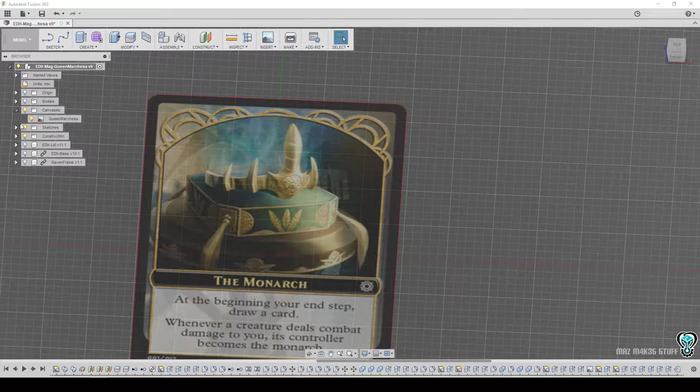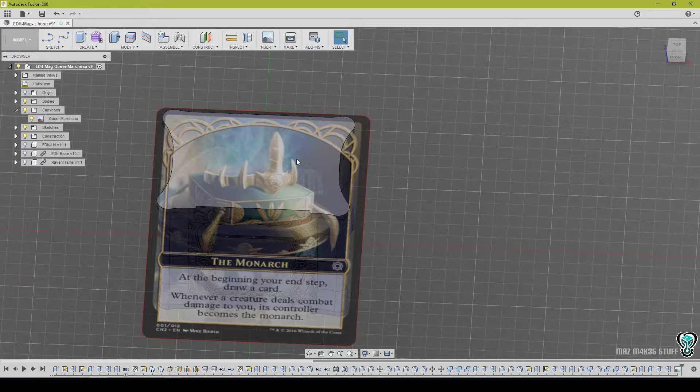So instead of starting a new file or anything, because I don't really need to, I'm just going to go back on my timeline down here to before I started creating stuff, delete that, and start back at the beginning. Now, since this image I have, the canvas, is basically just a reference, I don't really need it laying exactly over the top of my work - I can just move it over to the side to have it as my reference.

So I need to put the crown on the lid in an orientation that would be symmetrical, essentially. To start with that, I'm going to create a sketch on top of my deck box here, and make a center line, because I'm going to mirror it - that would be about the simplest thing to do.

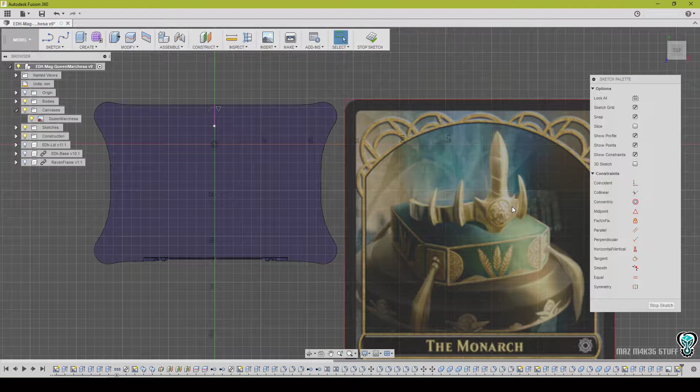So I have my little line there that I'm going to use as my center point. Now I'm going to start with the band of the crown, because that's going to be the main part. The spikes are something I would add later.

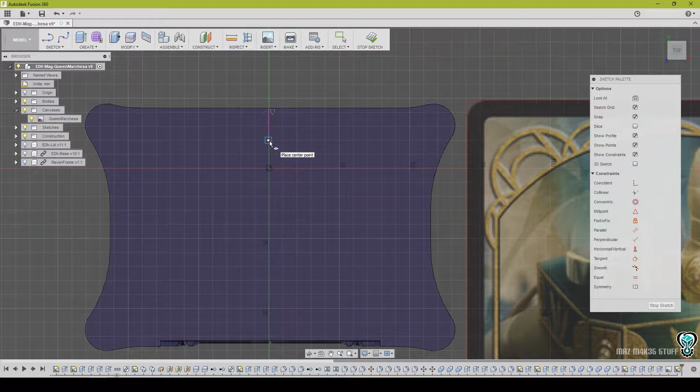So now I'm going to use an ellipse for this. You've got to define your center point, which was the center point of my box. If you snap to that point and then drag down - I'm going to turn off my bodies so it stops attaching to the bodies, and then I can keep that line there, which is what I wanted. Click for your center point, move over, click again, and now I have an ellipse - this is going to be my band.

For the band, maybe what I'll do is Control C, Control V to paste and move it up, so that way I have the same here.

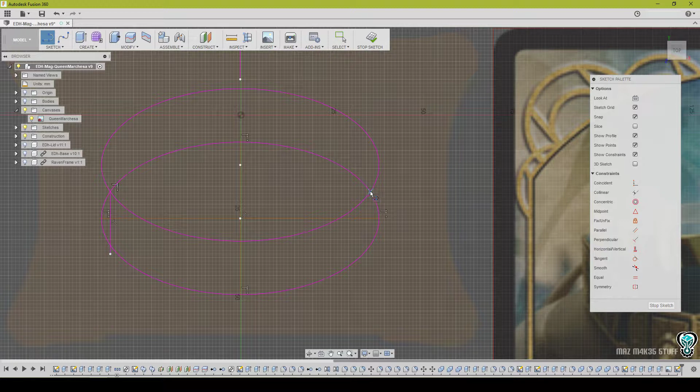And then we'll use the line tool, which, I mean this is kind of like just illustration basically. We'll go from this line here, and then do this one over here. Okay, so that is essentially this part here.

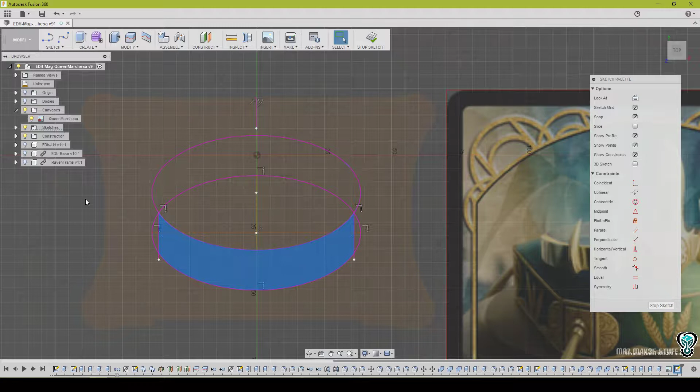What I'm going to do now - I need the part that wraps around. Well, I don't need it, but I think it should probably be there. I'm actually going to use the trim tool to clean this up, because I don't think I really need those parts at the moment, and it would be easier to work with.

So just trimming off that, and I think I'm actually going to use this line up here, so I'll leave that. And we're going to use the arc tool, and then mirror the arc, because I want a curve that's going to come back this way. I might not use it, but at the moment I'm just trying to draw the band here.

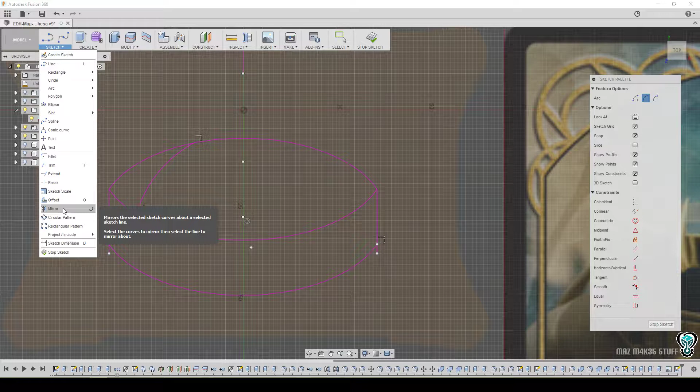Something around there, I think, would be okay. And then of course I'll mirror that - I should probably just do that now. So, in the mirror tool and sketch, I'll just copy that line over.

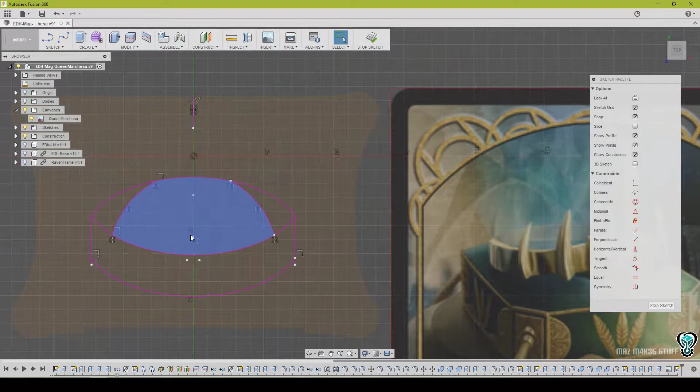So now what I need is the spikes - the main middle one is what I need, and then there are two spikes on each side, so there's going to be a total of five spikes. Since the center one's the main focal point of this whole piece, I'll just start with that first. And I think what I'm going to do is copy this one side over here, kind of like I did in the other video.

And I think I'm going to actually follow this curve all the way down to here. And then I'm going to use this line as my mirror. So we're going to copy that, paste it, move it over, and kind of line that up.

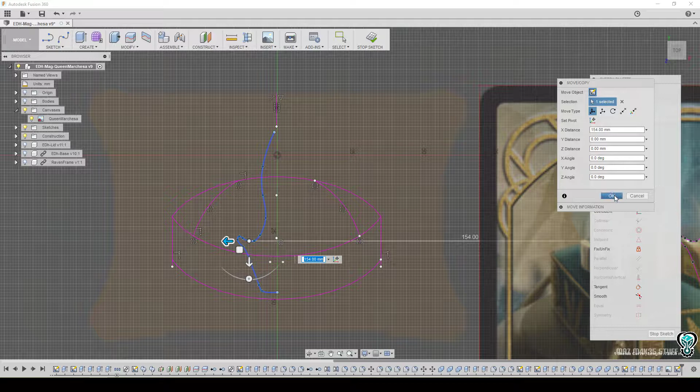And we'll make it so this goes up to the top. It's not gonna let me. Sometimes you can do that, sometimes you can't. You're probably not supposed to just click and drag on points. You're supposed to use the move tool, at least that's a better practice.

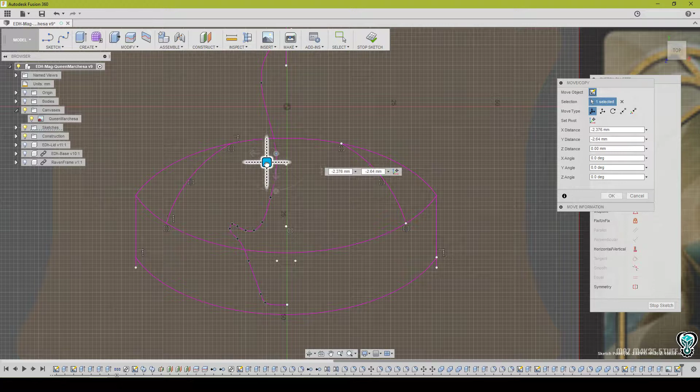Okay, so move these around and try to still capture the likeness of the crown. It's got to be recognizable, because that's essentially what the customer asked for.

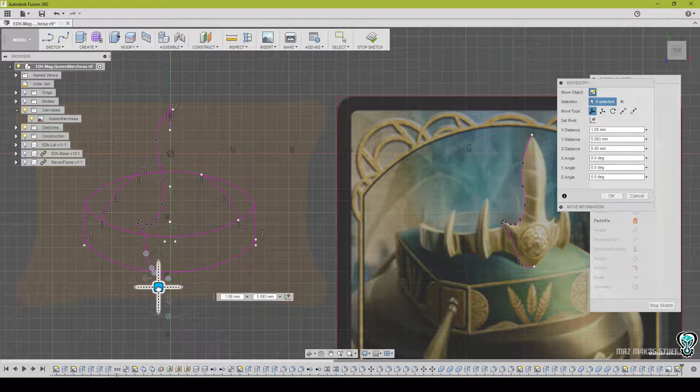So something around there, although to me it looks like I would want the bottom of this point, the center point, to actually come down past. So I'm just going to move that whole section so it's slightly past the band. And keeping in mind this center line, because I'm going to mirror this to make it symmetrical, I need to just make sure that this end is over there.

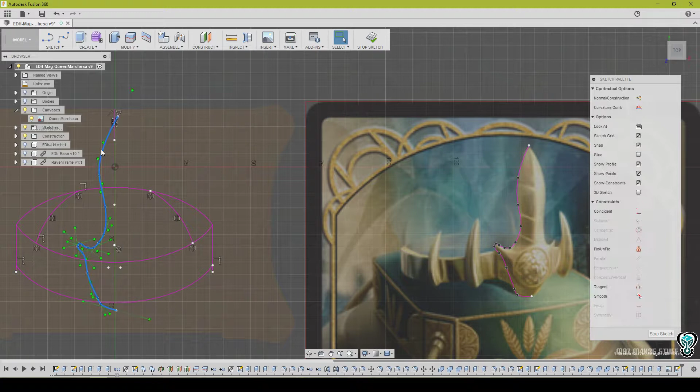So the curve comes in, might be a little bit too drastic here, so I'll take that down to match a little better. Let's see, maybe take this one up. Getting closer, I think that's pretty close. I think overall this curve here could be farther down. Comparing this spline, this profile, to this over here, I think that's pretty close.

So of course I'm going to mirror that, which I'll go ahead and do now so I can help visualize what I'm creating here. It'll be easier - I'm a very visual person, so it does help.

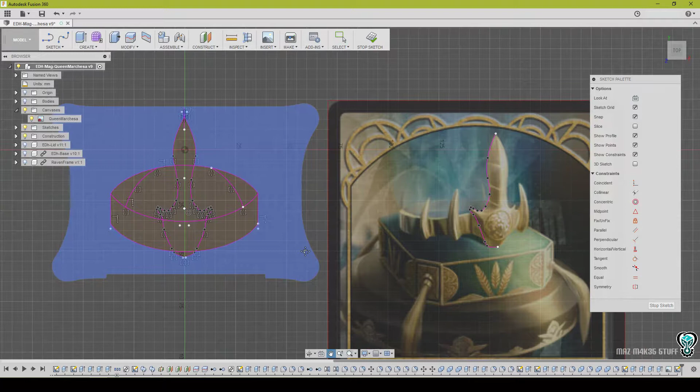First thing I'm noticing is I could definitely have my band shorter and wider. So we're gonna edit that a little bit. I'm probably gonna need to get rid of some of these constraints here, because I don't really need to edit those later. So I'm just gonna get rid of these, which I'm clicking on the constraint and pressing delete on the keyboard. That's how you can get rid of your constraints.

And then that way now I should be able to move that down, but I want to make sure I'm moving it with the points. So move this, select that point and that point, now move, which moves the whole thing. Oh, because it's constrained up here. Okay, so we'll delete that constraint first. Now it should let me go down.

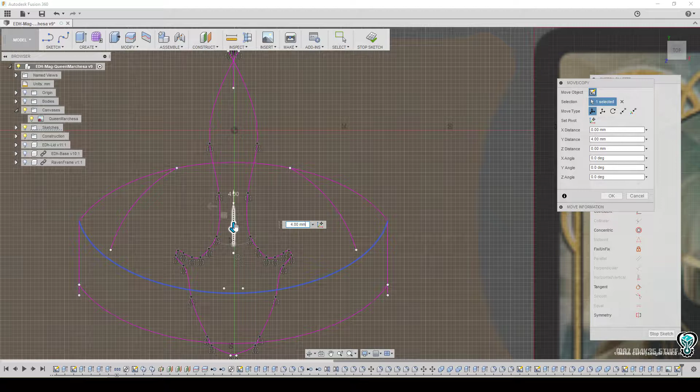But I need to make sure I'm getting these points too. Yeah, I think that's a little bit closer. We're constrained someplace else though. Oh, I bet you, is it this? I think that might have been the last constraint there. There, that's what I was doing.

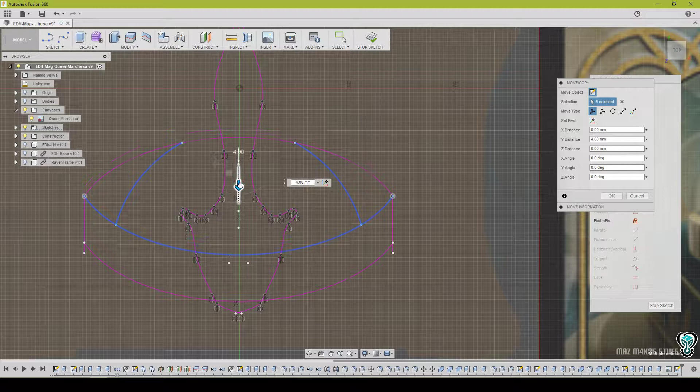And now that I'm thinking about it, I actually want these as well to keep it down. So come down, and I think that's a little bit better because it was too thick. A little too thick. Yeah, so that's better.

And then I think it should be maybe a little bit wider. Well, I don't know, now that I moved it down, I don't really know that I need to make it wider. I could just draw these spikes in, which I kind of want to keep the same curve, so I'm gonna copy this curve over here because I like it. I mean, it looks pretty good.

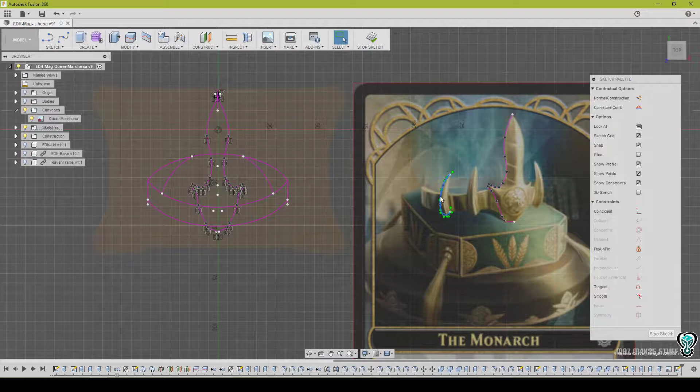And we'll just take this, and the reason I'm copying it is so that, in case if I change something with my curve over here on this side and I don't like the outcome, then I just have to redraw that curve again. So it's easier just to copy and move it over.

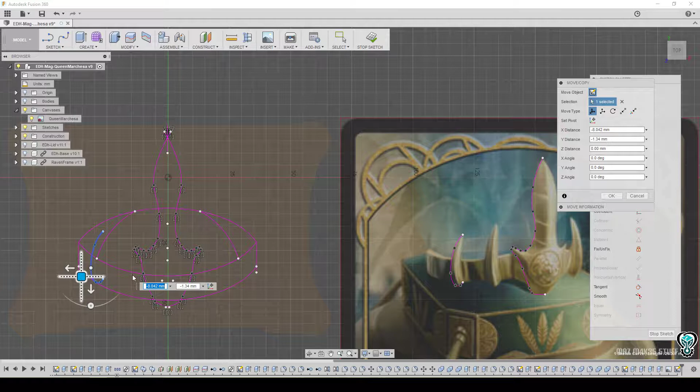So this spike is going to be kind of around here, looks like. Sorta, kinda. Yeah, because I think I'm going to want to have a slight band on the outside, then spike, spike, big spike, and so forth. Yeah, I think that's kind of what I want to go for.

And I think the spike should probably be a little bit bigger on that curve still, so I'm going to use sketch scale and make that a little bit bigger yet. Because it's just above - if we're matching this little height here with the height of the middle spike here, it's about that. So that's what I'm going to go for there.

I'm going to finish that spike off kind of there, and then we'll move this back over a little. Make sure you don't have it snap, because I don't necessarily want it to snap at the moment. So yeah, that's a little bit better on the spike.

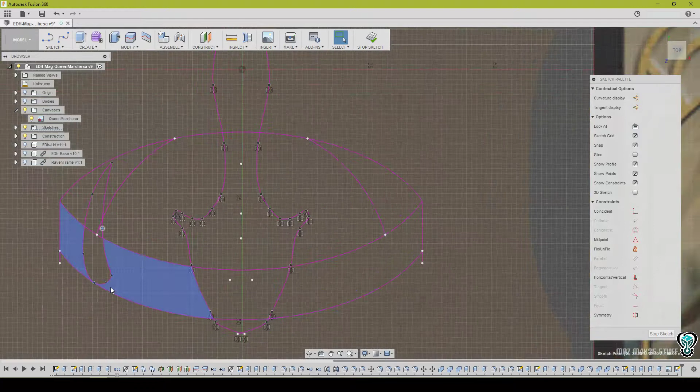The bottom overall should probably be lower, since it technically passes the band on the art. So we'll move past the band slightly. Yeah, about yay, it's pretty good - just something that's gonna be recognizable.

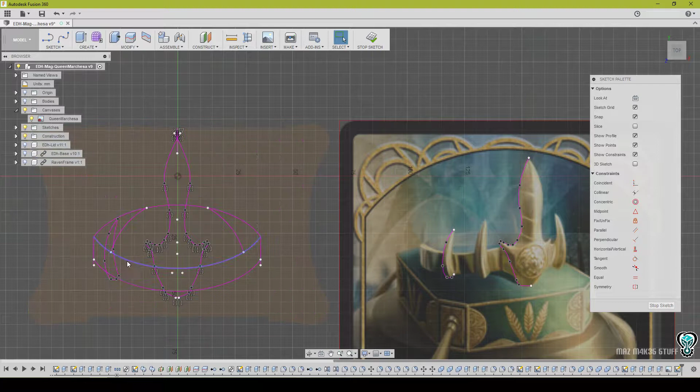Let's see, so we need the other spike, which I'm actually just going to copy this. So we're gonna copy it, paste it, move it over, and then I'm gonna use a sketch scale on this, and scale it from here. Oops, I'm using this - gotta remember to change it to point before you select your point.

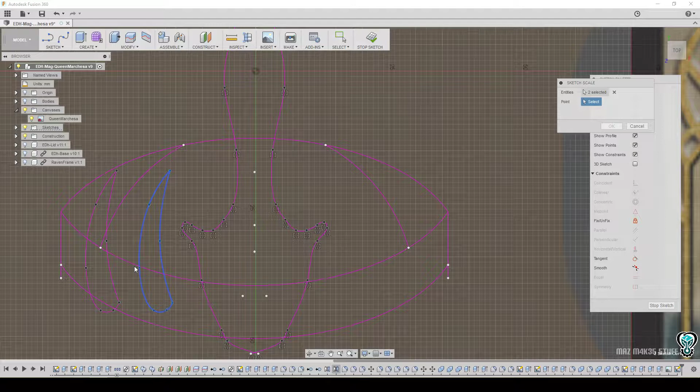Okay, and this spike goes gradually up here, so it's kind of pretty close to this hump a little bit, so I can kind of go up. That might be too much. Maybe around there - I think that looks pretty good. We'll go with that.

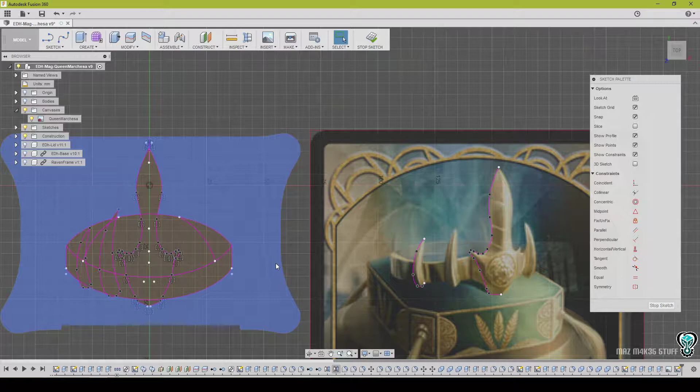Alright, so I got my two spikes - my main spike, and my band, which all looks pretty good so far. The thing I'm noticing is that the spikes are going to end up covering what I was going to use as my illusion for the band itself, like the going behind part.

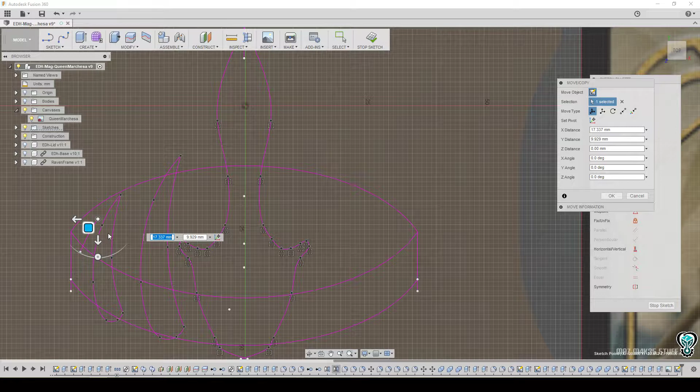So I think I'm going to move that over, maybe like that, and then probably take this down so it's a little bit less. Although honestly, I'm not even sure if I want to keep it now. Although I feel like it should be there - it's the illusion that it's going behind it. So I probably want to keep it.

I'm gonna delete that, because I'm gonna make a different arc for that curve. Delete that - we're gonna use the arc tool, 3-point arc. Okay, and over here, and probably about there. That looks a little bit better, it's not as dramatic.

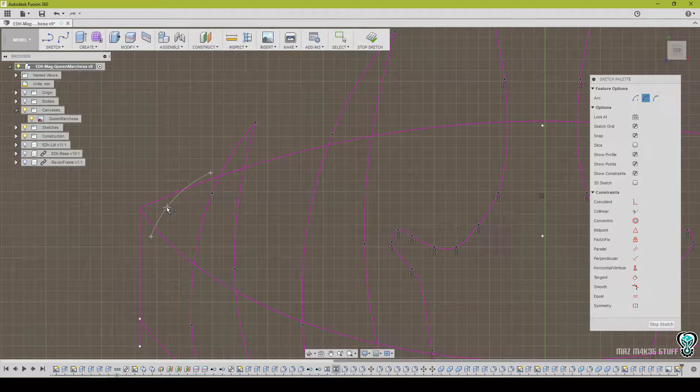And then just repeat the arc again, and like about that, and then we'll move that so it's in a slightly more believable spot. Yeah, something like that - I think that's okay.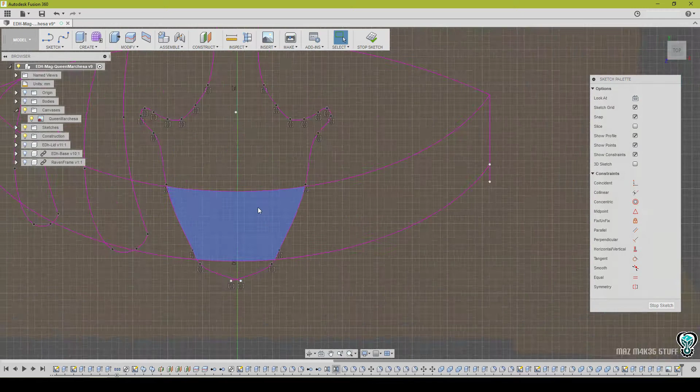So now the gem. Should put the gem in, which is just around the circle because of the way we're doing it. So gem, circle, sketch, circle, center point - because then that way I can just line it up with this line here. Come down, about here? And we'll just move it later. That's probably good, and then reference again.

I think that looks like a pretty recognizable size there, the height. Yeah, I think if it was from a front perspective, that would probably be good.

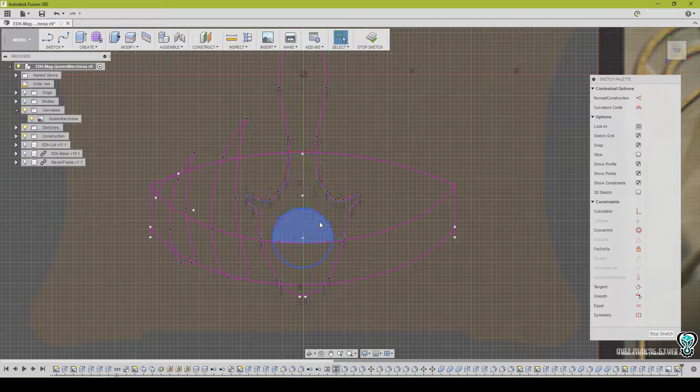On the other sketch, I made a fitting for the gem, because it's going to print separately, so I'm going to do the same thing here. So that's sketch offset, which is also O on the keyboard, and we're going to do 0.4 because that's the margin I like.

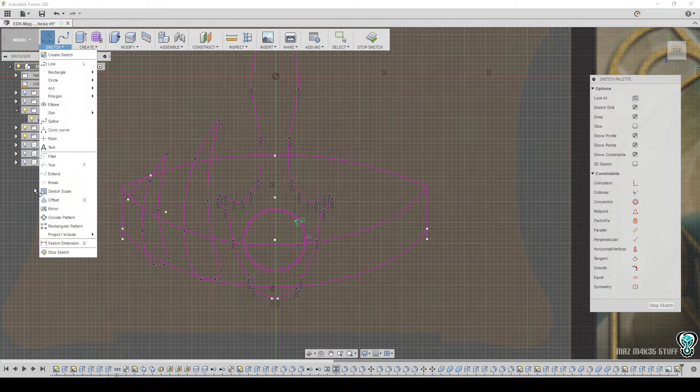Let's see, so we need to copy our spikes over. So we're going to do sketch, mirror, and mirror these spikes over, which I'm double clicking this line to copy it, to select it all, and then our line we made up here. Okay, alright, so that's our mirror there, and I would say we should go ahead and subtract this out.

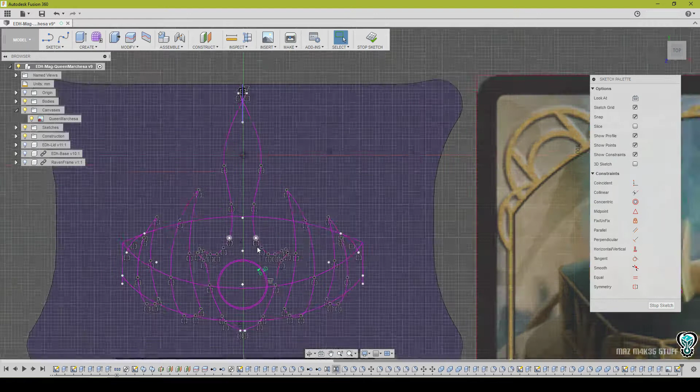So we're going to use the extrude tool, that's E, and cut this out of the lid.

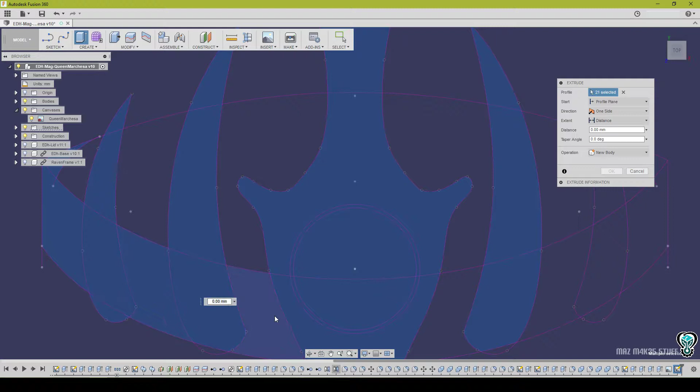All of it, the band. It's like a silhouette, we're cutting out the silhouette.

Okay, and I like -1, so I'm doing a -12. No, we're doing a -1. Let's stop hitting all those keys. Alright.

So same problem that I had on the other one is I didn't eyeball that too good. Because this little point here and then this part here, it's just too small. So let's go back, double click, edit the sketch.

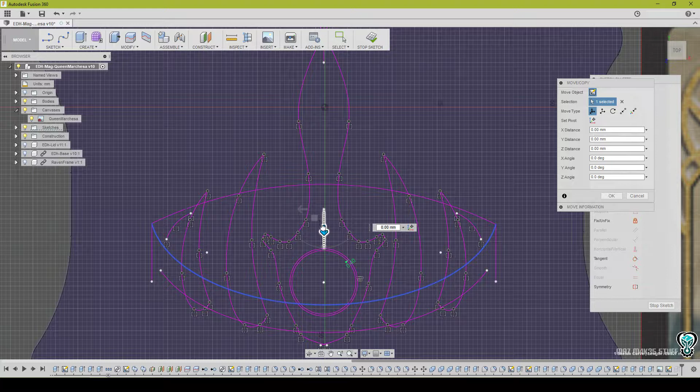And I think I'm going to actually just move this maybe? Yeah, if I move that over 2, and then I move this -2, the opposite direction, and then this, if I go up slightly to get back, there we go. The love of not having things constrained. Okay, this was -2, and this over here is 2. I think that's better.

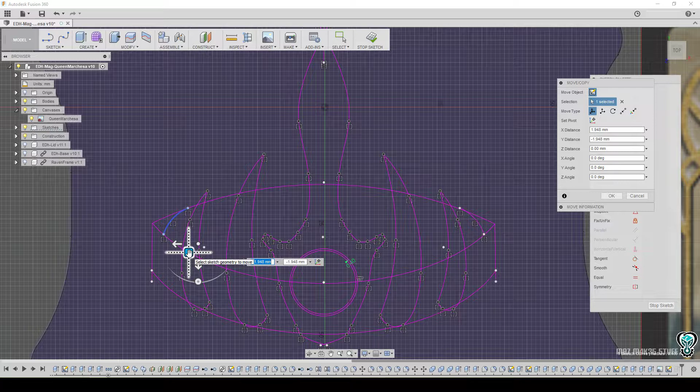Oh, we gotta remember these up here. Why don't we move these back? Yeah, like right there, I think that's better, right? Yeah. I still have, no, my sketch is not closed. I moved it wrong, let's try that move again then.

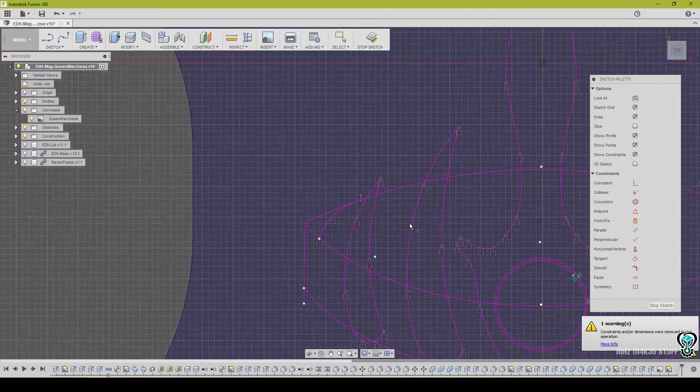How about there? Close profile? No. Alright, extend I guess? There, that's probably what was wrong. And I probably need to do it over here. Well no, that's actually in a different position, so we'll have to redo this, so we'll delete it.

And re-mirror this, so mirror, select, and it's over there. Okay, that's back in the right position, and yes, we have a separate profile. Alright, and I need to tell you what the new profiles are. So no, we don't want that, don't want that, don't want that, don't want that.

Yeah, alright. I think that's a better silhouette. That's actually kind of cool.

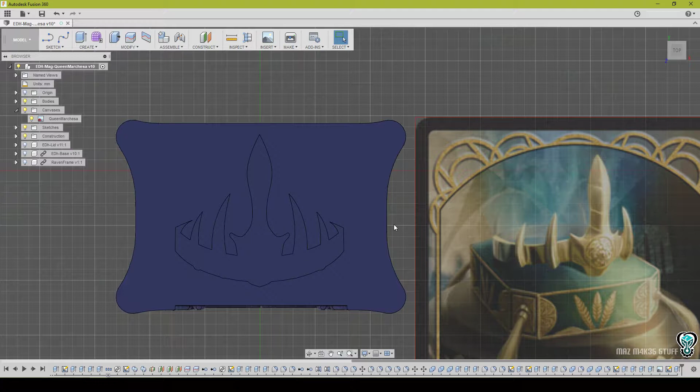I am interested, alright. So the next thing that I am going to do is offset this because I need the fitting, because it's going to be an insert that goes in. So I am going to create a new sketch here.

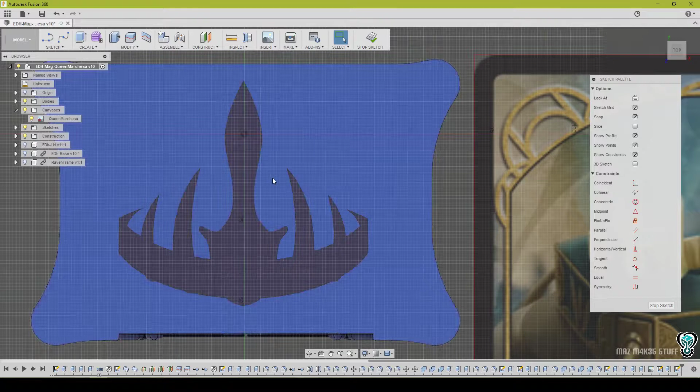I'm going to use that offset tool again, which is O. I'm going to do -4 because that's what I like. And then take that out. Extrude, do -1 because that's what we went in at cut. Okay, so now I have that extra cut there.

Yeah, which is good. So now I'm going to extrude out the crown that I made in the first sketch. So I'm going to extrude this. And we're going to do everything with the spikes, like last time. I keep saying like last time, like you watched the previous video.

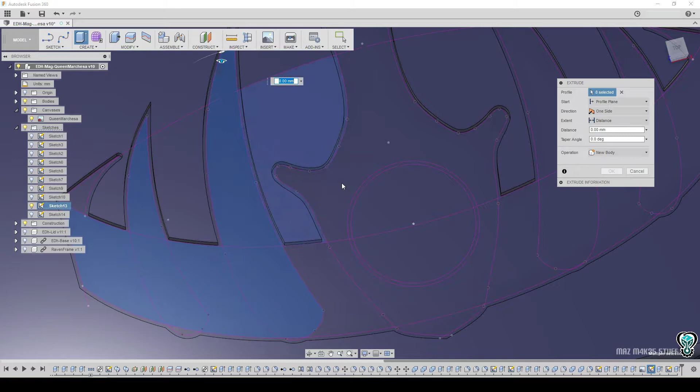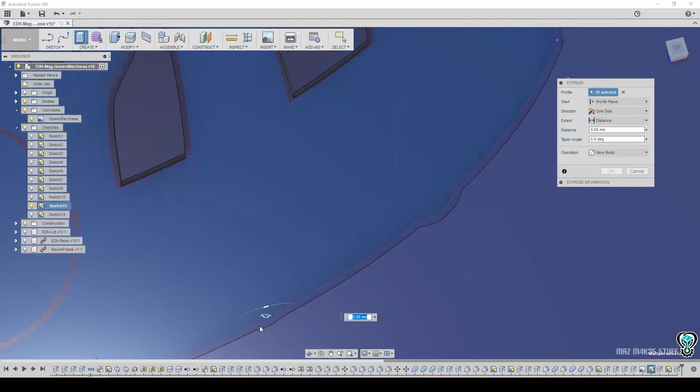Alright, here and here. Here, almost got it. So close. Did I get it all? No, this part, and that part. Alright, I think I see it all now.

Alright, so we're gonna do 1 millimeter up of that. Yeah, alright, and now we're going to extrude out the spikes. So I'll hide my bodies so I can reselect this here.

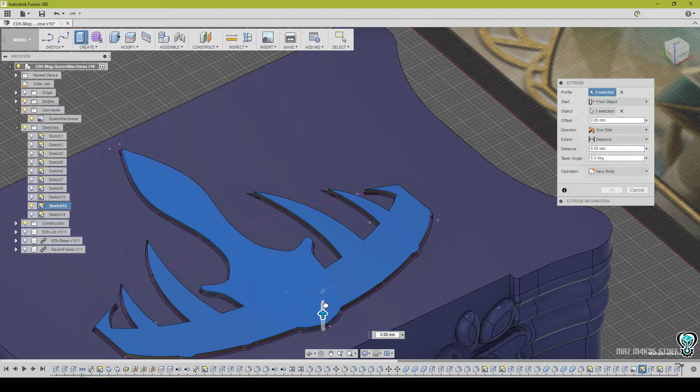So I was going to do that same extrude and give the extrusion an angle, so that way it kind of captures that sort of angled look of the crown spike. So we'll do from object, select top, go back to profile, go up, and let's just type in -5 maybe. Can I get that? Okay.

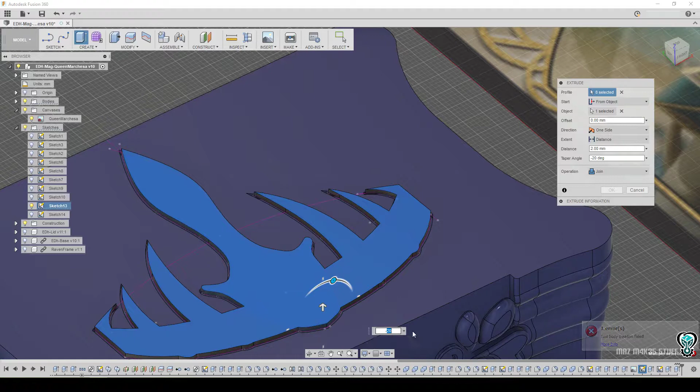How about 15? How about -25? No, 25. How about 20? Ha, we will stick with 15. That works. Okay, and distance of 2 millimeters.

Do I want that? No, not really. That's kind of a little bit much. Well, no, yeah, I'll stick with 2. Alright, so 2 millimeters on that spike, and then I'll do the same exact thing for these other spikes here, and extrude them out.

So I'll get all my profiles selected. And here. Alright, and turn the bodies back on.

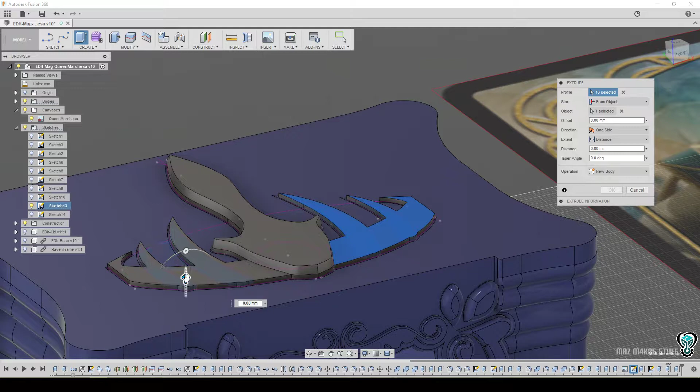We're going to do a from object extrusion, select face, go back, and then pull these up. And I'll do 2, the same thing, and probably -15 again, hopefully. Yeah, can I get a -20?

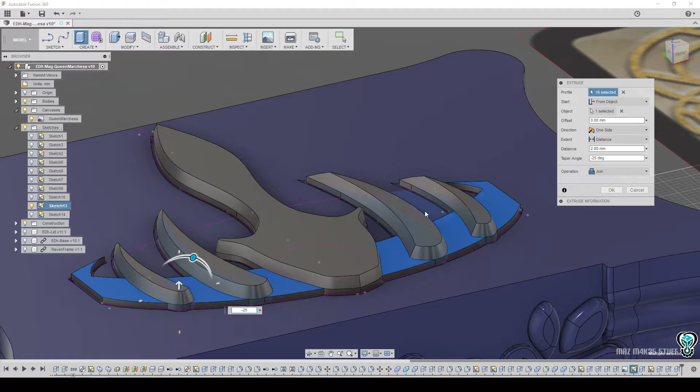Yes, I can. Can I get a -25? I can. Oh man, should we go 30? Would that be good? Should I go -30? Let's try a -30. I think I'll stick with -30.

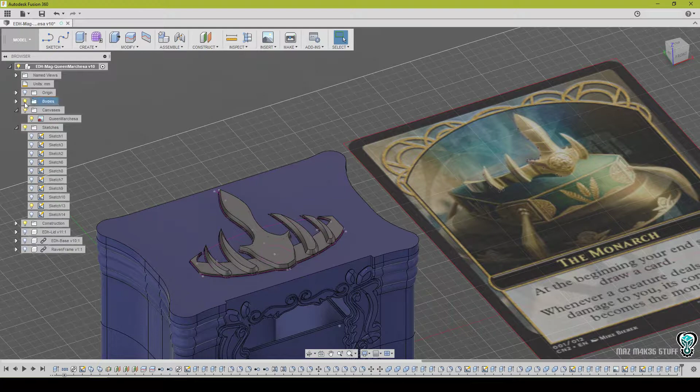That looks pretty good. Alright, so my crown is almost done, except I need to take my gem out. I'm going to hide bodies and extrude my gem, making sure I get the fitting that I made.

Cut the hole out. Say okay, and then I'm going to extrude what I'll use as the gem, doing a flat extrusion, and then another extrusion with an angle. This one I'll do at 1.

Say okay, and then just extrude from the face, go up, and then take it in. I think I might want to go up just a little bit. Maybe just 1 extra millimeter out, because I don't want to be too terribly tall. That might look weird.

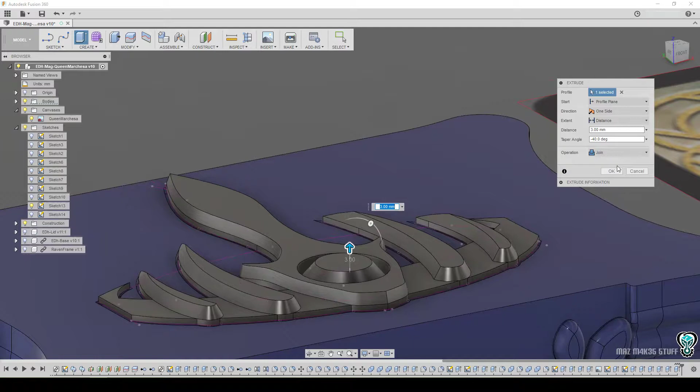Man, I feel like this one looks so much cooler than the last one, but that's my opinion—we'll see what the customer says. So we're going to do some extra curvature. I think because of how small these are, I'm not going to do the draft I did in the other design. I'm just going to leave it the way it is.

I do, however, want to, before I try to use the chamfer tool, make sure to save, because I could break it.

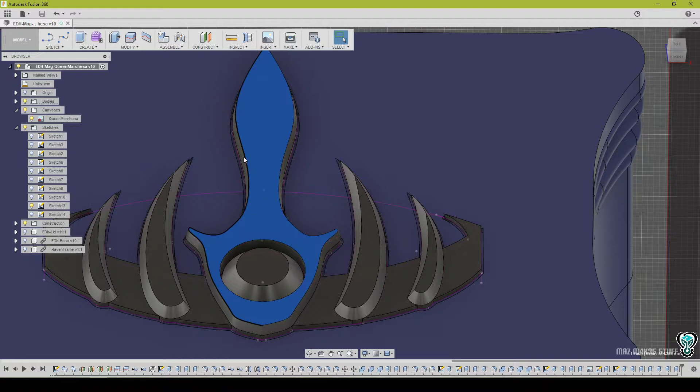Okay, chamfer. Let's try 2. No, that wouldn't work. 0.5? Maybe no. I think it doesn't like this little curve over here. It's probably why it doesn't really want to go very far, if at all.

So can I do a fillet? Press pull, 0.5? I can. If you hold control, select the other side, and try 1. Yes. Should I go in a little more?

Yeah, can I do 2? I can do 2—ooh, that's a little too far right here, though. Maybe not 2, maybe 1.5. I think that's probably okay. Well no, I'll stick with 1 because I want to stick a fillet on this.

So it's slightly curved. It ends up a little more, I don't know—the print looks nicer if it has a slight edge on the curve for the top layer, kind of thing.

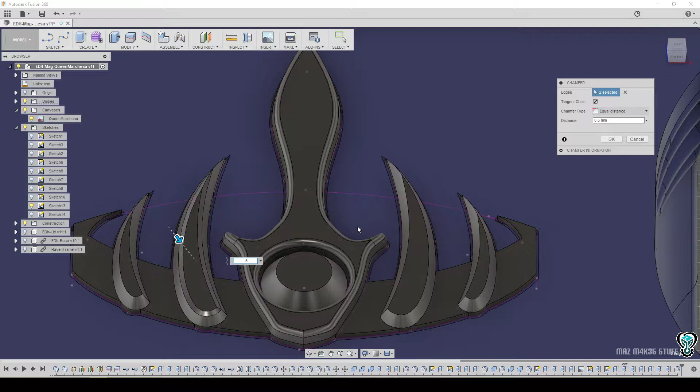So we'll try a chamfer with this here, see if it'll work. It will. How about 1? Yes, let's go ahead and click. While holding control, you can select these other edges, and hopefully it'll work.

Nope, it probably doesn't like the smaller ones. So I'll unselect those. Yeah, okay, so we'll do them separately. That's fine. So okay, and go ahead and do the same chamfer over here.

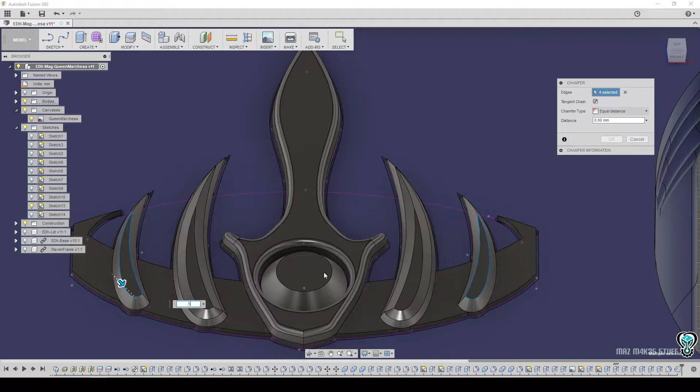Instead we'll try 0.5 maybe? I think 1 millimeter is what I tried on the other one—yeah, so it didn't like that. Maybe 0.8. I don't really like this edge here, so I'm gonna do like 0.6. And that's a little bit better. Okay.

The other thing I probably want is to add a curve on this here to be closer to the curve that's kind of in the drawing, the art that we're referencing. And maybe I'll curve this edge there.

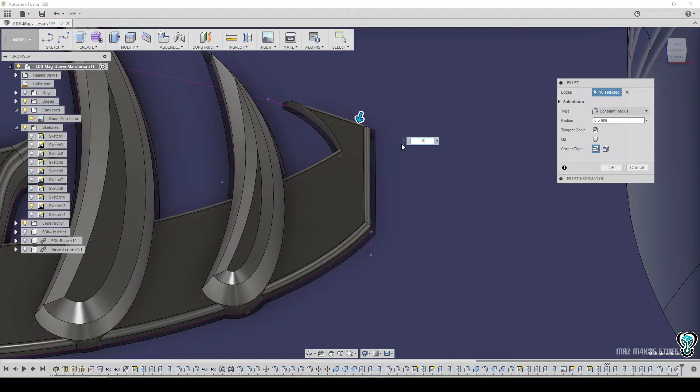Alright, maybe 0.5? Should I do 0.8? Yeah, 0.8 seems pretty good. That looks good, right? Yeah, I think so. Alright.

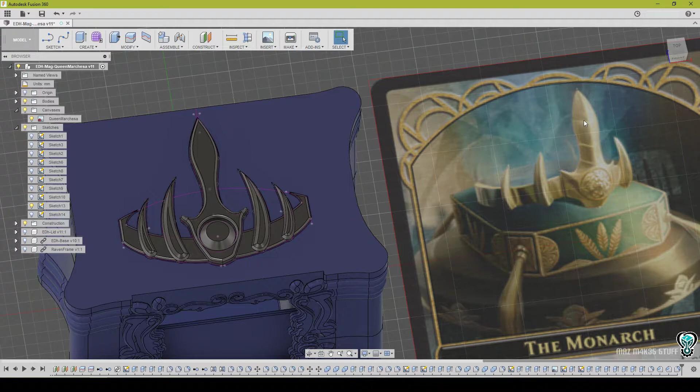And man, I think that looks cooler. You know, should I add in the little cut marks here that are on the art? There's 3 of them. Oh man, you know, I think I might have time to do that. So I think what I'm gonna do is add the illusion of those cuts.

Okay, better save. And we'll go back and edit the sketch of the crown, and I'll create—oh, what angle are these? Oh well, they're like that kind of angle. Here, I'll do all of them, right, so that way they're at the same angle.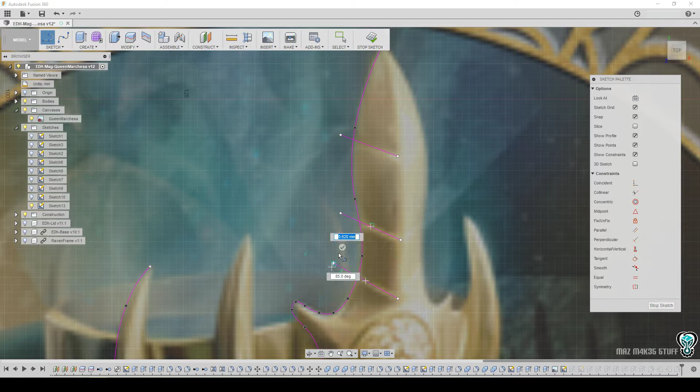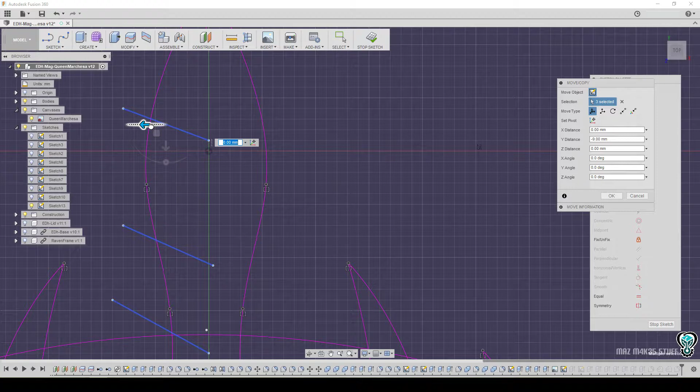Say okay, and then we'll copy these over, and put it over here. And that's actually pretty, it's like just above the curve, so I'm gonna want to move that up, like there. That should work. Yeah, and then I think with these lines, since I'm gonna do them as well...

You know, I could do it as a split face—that's what I could do. So first we need to have this mirrored, so it's exactly the same on the other side. There we go. And because I'm going to use it as a split face, a splitting tool, I should probably use the trim tool to clean this up.

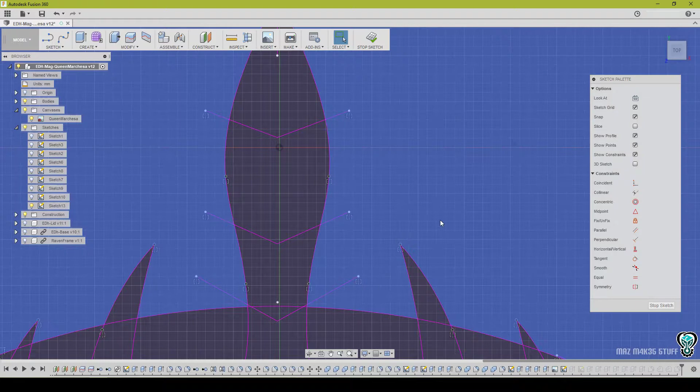There, now it's cleaner, and it should work for using it as a split face. Alright, so stop sketch, and hopefully everything kind of still looks the same.

Yeah, I think right about here is okay. Because that was, yeah, that was that. Okay.

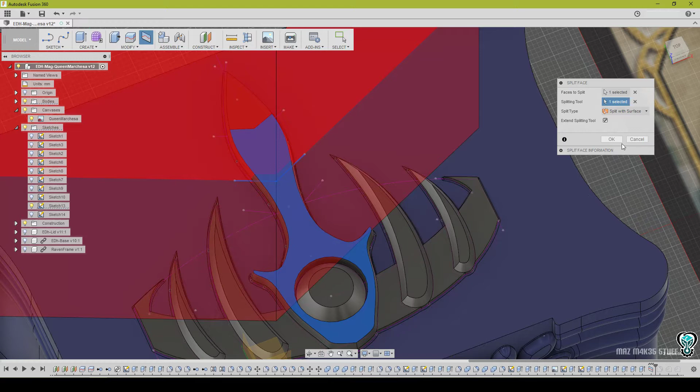So I am going to do a split face of this here, and this is my tool. And then I'm going to do it again. Split this face, use this line, okay, and then do another split face, and use this line here.

Alright, and then I think what I'm going to do is just extrude these at separate levels. Ideally I'd want to use a draft, but that might be a little bit complicated with how much time I have left. So why don't I hide my sketch, that way I can...

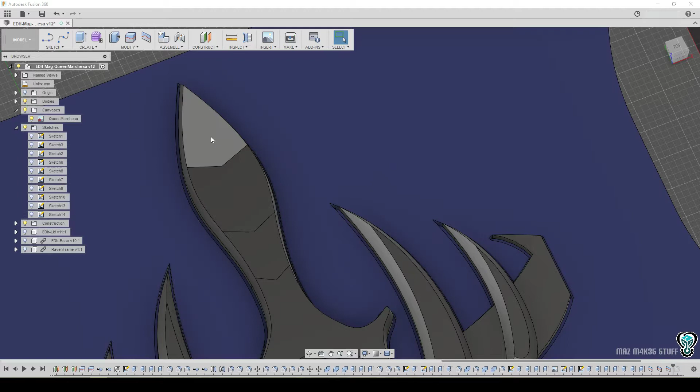So I'll do an extrude. I'll do this at minus 0.5, right? And then do this at a... okay, wait a minute, are we going up or are we going down? We should go down.

Because I need to keep in mind layer height. I'm probably going to print this at 0.2, so if I do that at 5, that wouldn't really work. So I actually want to do this at minus 0.6, minus 0.65. We'll just go with that.

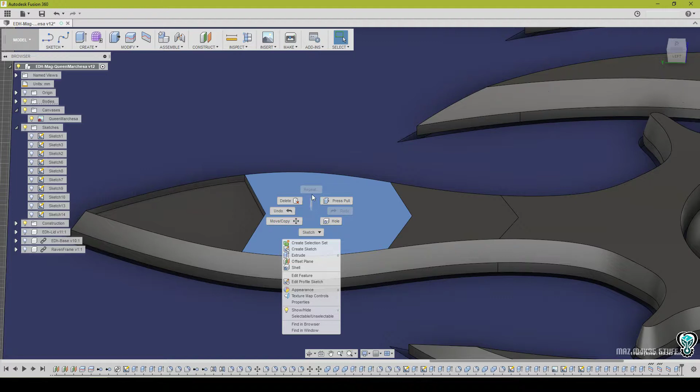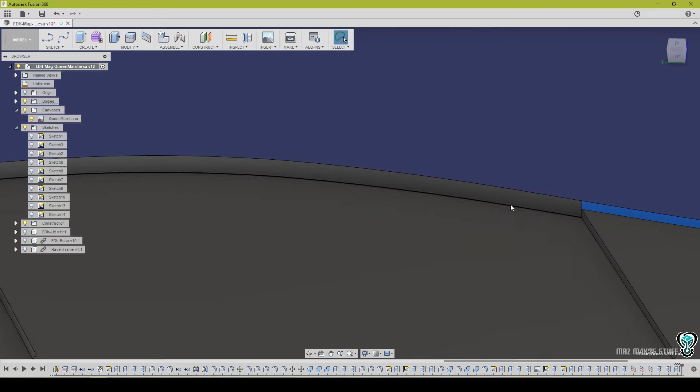Okay, and then this one I would want to extrude at minus 0.4. And then do this one at minus 0.2. Ah, gotta be in the tool before it works. Minus 0.2. Alright, and then with these little faces here, we're just gonna hold shift and select them.

And hopefully it'll let us get rid of them. Otherwise we'll try to do something else. Okay, delete. Yay, it worked. Okay, so now that's like a little stair step.

That'll, on the print, mimic that same thing there. Step forward and see in our timeline. Nope, yeah, I know, you probably don't know what your lines are. What didn't you like? Oh, you just didn't like the angle, and you don't have the thing selected.

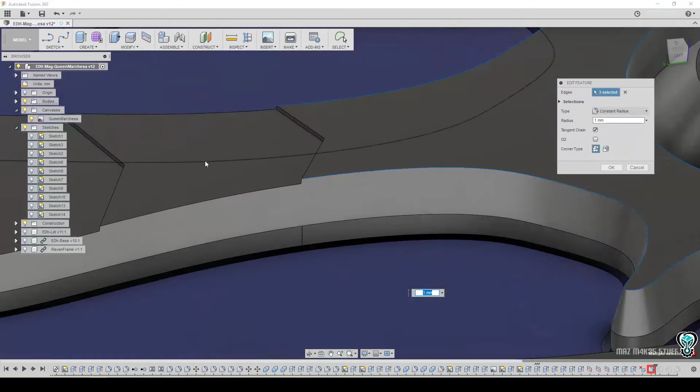Okay, so let's add these. Clear this out, because it's just going to keep giving us the error. And plus, we'll probably need to find a new fillet radius anyways, one that's going to work with these new cuts in here.

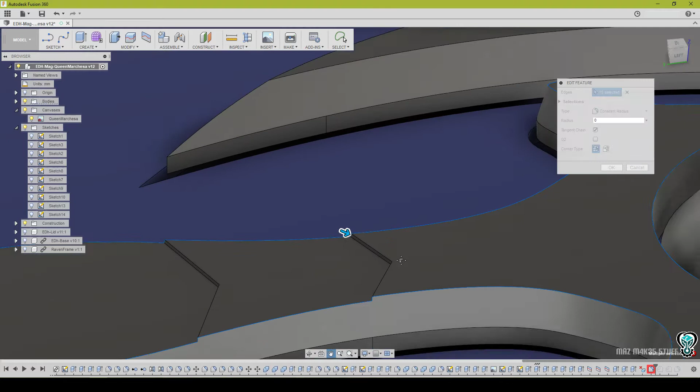Alright, and try 0.5? No? Try 0.1? No. So, let's see, what can we try?

Yeah, we could do it this way. If we do like 1 on that, and then do a new fillet here, and then do like 0.6. And then on this one, do maybe 0.5, so just vary it by a 10th or something.

And then can we maybe try this at like 0.4? No, it really doesn't like those lines. What if I select them, if I add them? No. So it doesn't like those.

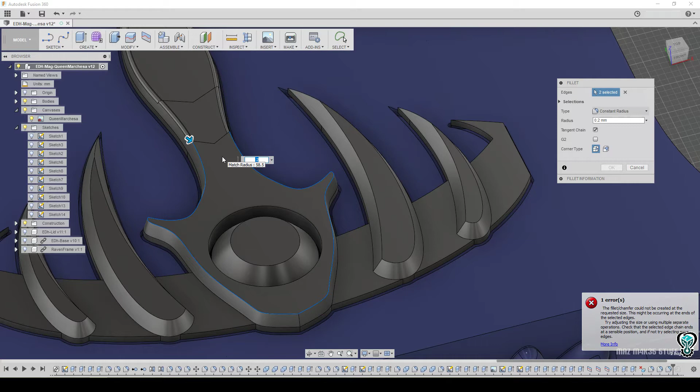Unselect you. Okay. And 0.2? Forget it, can I go very far? No, I can't. So I can't get a very good fillet on this now that I've added those lines.

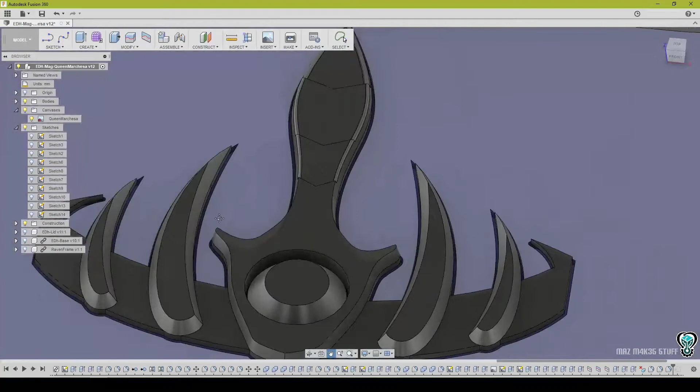I wonder if I add a curve to these here. Oh, there's like 2 lines there. Interesting. So if I just do a fillet on this... no. Alright, well, I think these lines are probably more important than having a fillet there, so I'll

just leave that. You can still add the fillet here, and I don't think it really takes away from it that much. So then stepping forward, that, and that, and that. Okay, cool.

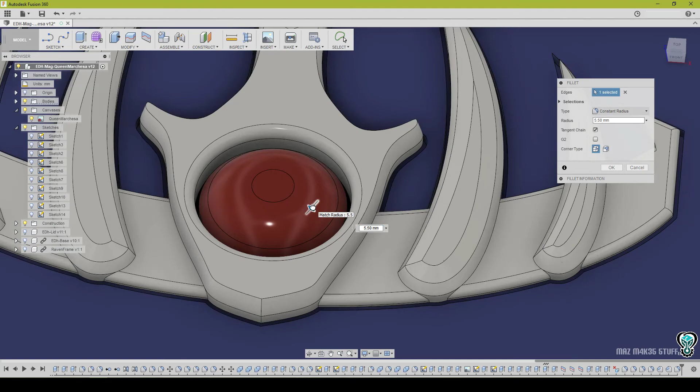Oh, and you know, I probably want to add a fillet to this right here. Yeah, well, maybe not that much. Yeah, right about there. Alright.

I would say that's the new one that I would send to the customer and see what the next feedback is. I think this one looks way cooler than the last one. You have to tell me what you think.